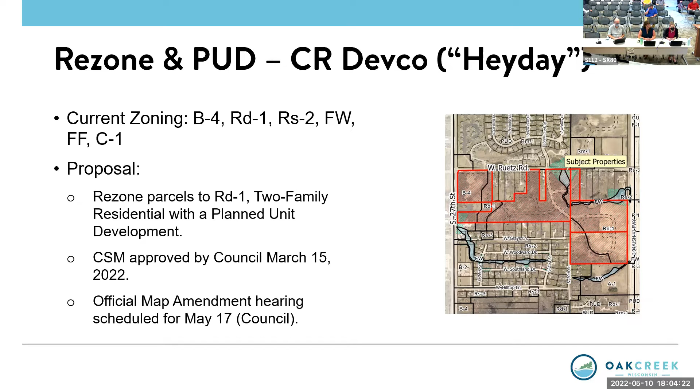RD1 to two-family residential with a planned unit development on Lot 1 of that CSM to be recorded. That CSM was approved by the council on March 15th of this year. The official map amendment reconfiguring the proposal for future street patterns throughout the properties is scheduled for a hearing before the Common Council on May 17th.

So to acquaint you with where we are talking about this evening, it is only Lot 1 as shown on the screen per that certified survey map that is affected by the rezone and PUD before you tonight.

On the screen right now is the concept development plan. This is considered the general development plan for the PUD. It does show future public streets, that connection to Puetz Road from the north, connecting down to the development on the east side of the property.

The public portion will terminate in essentially a cul-de-sac roundabout with a private development road that extends off of that cul-de-sac. 20th Street, as previously mentioned in other reviews, will have the cul-de-sac extended onto the development parcel, but it will be gated for emergency access only.

The proposal includes 134 single-family residences in a 4, 6, and 8 unit configuration in 22 ranch-style buildings. There will be one leasing and mail office at the beginning of the development on the north, accessed off of Puetz Road.

As previously mentioned, remaining lands to the west, lots 2 through 4 of that CSM to be recorded, are not part of this rezone and PUD request. There is no proposal for development of those lots at this time.

Included in the PUD are cottage home models, the design of which incorporates some craftsman style as well. They range in size from about 830 square feet to about 1,700 square feet. Materials include vinyl in various configurations, a brick base throughout the entirety of the building itself, and asphalt shingles.

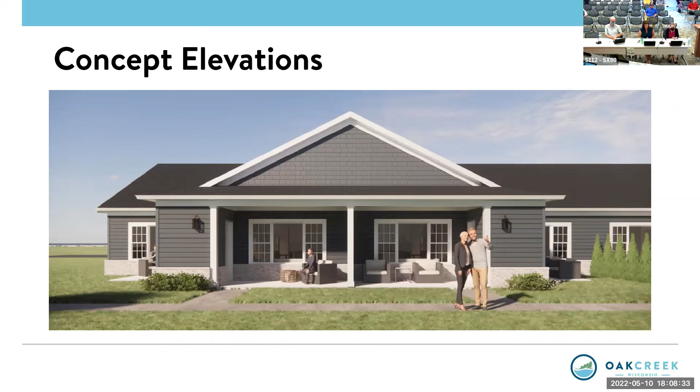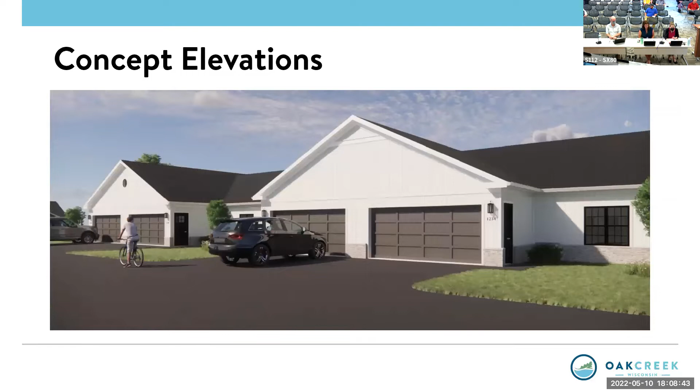On the screen right now are concept elevations showing what the configured buildings would look like. Again, these are attached units, however they are in a single-story, single-family, private walk-up entry configuration. There are various models that would look very similar but provide overall cohesiveness in the development while still allowing for some variation in color and materials.

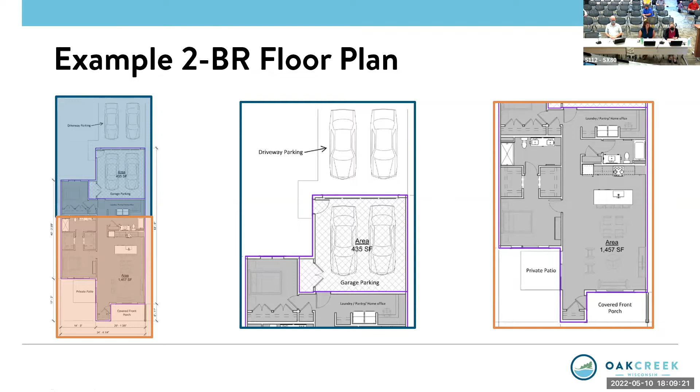On the screen right now is an example of how those two-car garages are attached in a 2-bedroom configuration. It's split up a little bit so you can get a better idea. This would be the overall configuration here on the left, the garage area, and then the parking area. So it shows that 4 parking stalls are provided for a 2-bedroom unit, and this happens to be a 1,457 square foot unit, which is an average 2-bedroom unit for the development.

There are a couple of revisions that would need to happen should this be recommended for approval. Stormwater and grading plans may need some revisions, and there is a requirement for a tree preservation, removal, and inventory plan, both pre and post development, so the applicants are aware of that requirement.

There are also currently discussions going on with SEWRPC regarding the secondary environmental corridor. There has been DNR approval of wetland fill permits. There's one small pocket of wetland that would be filled to accommodate the development road, so we are anticipating SEWRPC's determination relatively shortly. They've been out on the property in the last 2 weeks.

Just to remind the Plan Commission, the initial recommendation of approval of this PUD and rezone is not an endorsement of any site plan that has been presented before you. Any specific site, building, landscaping, or other approvals that would be required as part of the PUD conditions and restrictions would be brought back to the Plan Commission for those specific approvals.

Included in your packets were also something new as part of the code, and those are standards for review. Those are what you must base your findings upon when you make your decision for the rezone and PUD. With that in mind, there is a suggested motion for consideration on the screen.

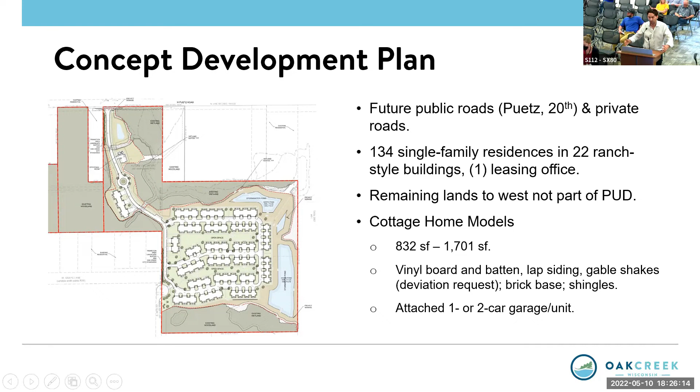Can you provide a little more information regarding, we had a couple residents with concerns, one about the grading plan and then the other with the erosion issue? Sure. I think when the appropriate time comes, when we receive the official comments from staff's review of the stormwater and all of those things, which as I understand comes at the next step, we'll make sure to have the engineering team that we're using look at that, and whatever we need to do to conform with the standards and requirements, we'll make sure that we do.

The erosion is something new to us, and if we're able to restore that, since it is in a wetland, and anytime you go into a wetland it requires DNR approval and sometimes Army Corps of Engineer approval, we'll look into what we can do to try to restore that.

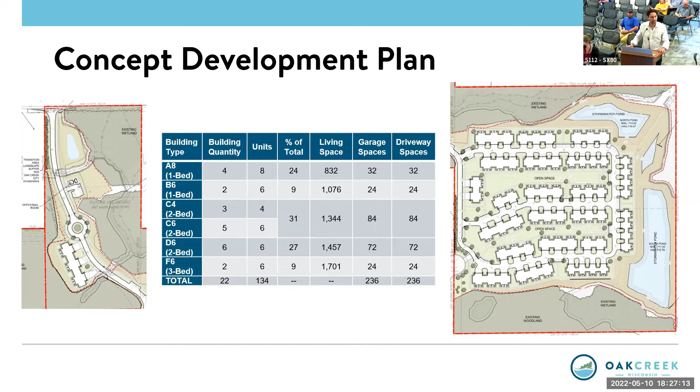Okay, and then the other resident had questions about the barrier between the current single-family houses versus the RD1 two-family residential area. Could you provide a little more information on that? Yeah, absolutely, I think Carrie did a fantastic job. We're developing lot 1 only. We have no plans right now to develop lots 2, 3, or 4. There's a lot of challenges to developing those sites, and we had originally looked at possibly developing that portion of the site. We thought there was an opportunity for everything closer to 94 to be a higher density product, like you see across from IKEA. That was our original plan when we started looking at the property, and we had to modify the plan based on all of the issues and challenges of the site, which are many, given that's the main reason why this has sat undeveloped for so long. So with the challenges in place on lots 2 and 3, we don't have any current plans to develop that portion of this property. Okay, thank you.

I just have a question for clarification, I believe it'll be for Carrie. So with the rezone, the property is already, it's not half and half, but it's already RS2 and RD1, correct? So this would rezone and make the entire piece RD1, the entire lot 1. Lot 1, you're partially correct. A majority of lot 1 is currently RD1. So if you can see my cursor, this area that is basically a rectangle, that's already RD1. What we're talking about is the access from Puetz Road and the rest of lot 1 in orange here.

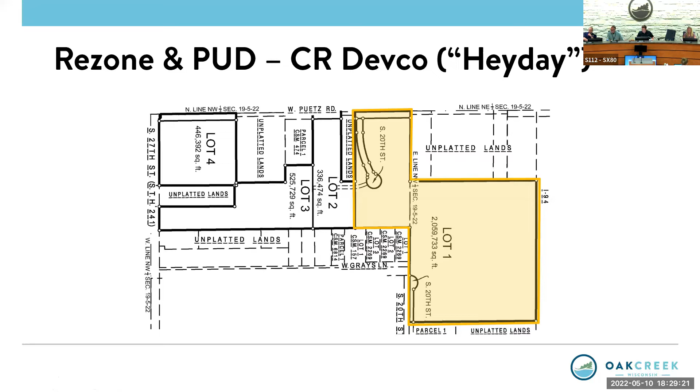Okay, thank you. So if there's no other questions from commission, I will look for a motion on item 7A.

Zakowski moves that the Plan Commission recommends to the Common Council that portions of the properties at 2231 West Puetz Road and 8843 South 13th Street and 8950 South 20th Street be rezoned to RD1 two-family residential, no change to floodway, FF flood fringe, or C1 shoreland wetland conservancy districts with the planned unit development, after a public hearing and subject to conditions and restrictions that will be prepared for the commission's review at their next meeting on May 24th.

Seifert seconds. Roll call, beginning with Commissioner Carrillo. Zinsky, aye. Loreck, aye. Zakowski, aye. O'Donnell, aye. Seifert, aye. Chandler, aye. Hannah, aye.

That brings us to item B in new business, a certified survey map. Review a certified survey map submitted by Mark Verhalen dividing the property at 500 East Oakwood Road.

Thank you, Alderman Loreck. The property at 500 East Oakwood is zoned RS3, single-family residential. This proposal is to divide the property into 3 separate lots, all of which conform to the dimensional standards and requirements for the RS3 zoning district.

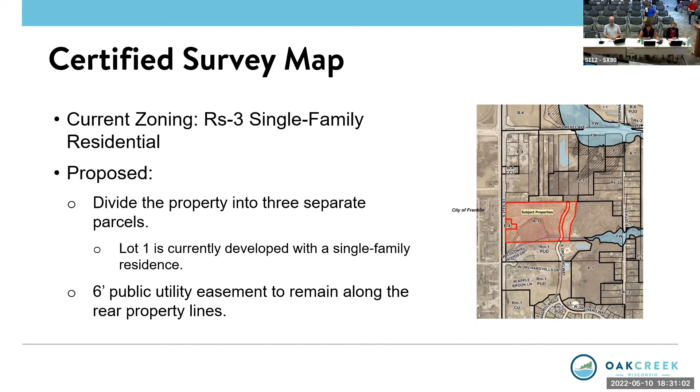Lot 1, which you can see on the left, is currently developed with a single-family residence. There's also a 6-foot wide public utility easement that will remain along the rear property line. And that's all I have. A motion has been provided for your consideration.

Thank you. Does the applicant have anything to say? Just want to wait for questions. I'll wait for questions. Okay.

So we'll go to commission, starting from my right with Commissioner Chandler. No questions, thank you. Commissioner Seifert, no questions. Commissioner Oldani, no questions. Alderman Guzekowski, no questions. Commissioner Kipchinsky, nothing from engineering. Commissioner Carrillo, nothing for me.

And Commissioner Hannah: just one question. So this is east of Howell? Correct. And this is where this golf site is? No questions. Okay, and I have no questions. So I will look for a motion on 7B.

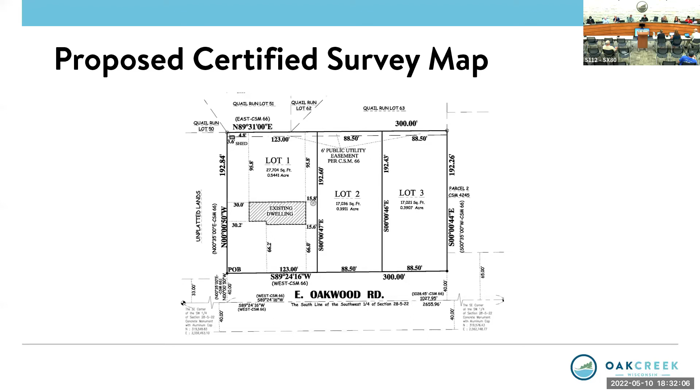Donnie moves that the Plan Commission recommends to the Common Council that the certified survey map submitted by Mark Verhalen for the property at 500 East Oakwood Road be approved with the following condition: that all technical corrections, including but not limited to spelling errors, minor coordinate geometry corrections, and corrections required for compliance with the municipal code and Wisconsin statutes, are made prior to recording.

Guzekowski will second. Roll call beginning with Commissioner Kipchinsky. Shinsky, aye. Lorik, aye. Guzikowski, aye. Oldani, aye. Seifert, aye. Chandler, aye. Hannah, aye.

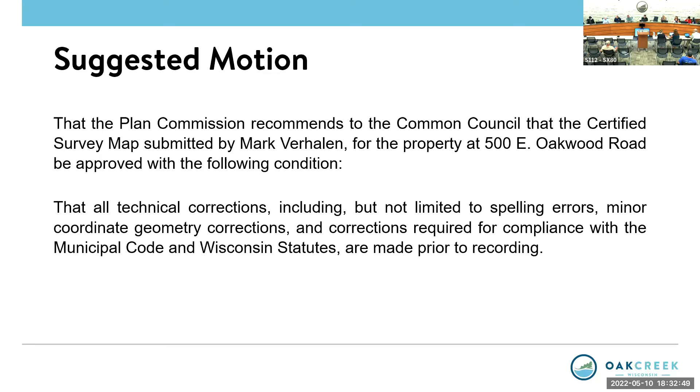Thank you. That brings us to 7C, plan review. Review site, building, landscaping, and related plans submitted by Tracey Erickson, Erickson Enterprises LLC for a car wash facility on the property at 140 West Puetz Road.

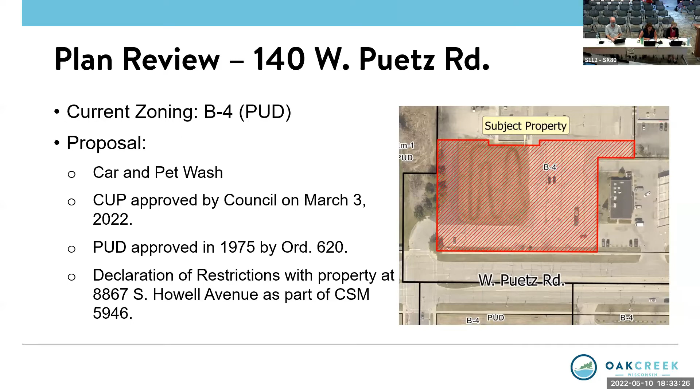Thank you, Alderman Loreck. The applicant is requesting site, building, landscaping, lighting, and related plan approval for the Peak Car Wash facility. Commission may recall approving a CUP in the last few months to operate a car wash on this property. This property is also subject to a 1975 PUD approval and a declaration of restrictions with the property at 8867 South Howell Avenue as part of CSM 5946. All these documents were included in your packet for review.

The proposed site plan on the next slide shows a 5,136 square foot automatic car wash building that includes an office on the southeast corner and a pet wash on the southwest corner. The building is oriented on the south side of the property.

There's an access point to the property from Puetz on the southwest corner of the site. There's a driveway that wraps around the south and east side of the site to access 3 drive-through lanes with payment kiosks. Parking and vacuums are in the central portion of the property, which will provide some ability to hide it with the proposed building. The lot and proposed building meet all dimensional requirements and setbacks.

The plan shows that the layout of the site will preserve cross-access over the property at 140 West Puetz for the benefit of 8581, 8645, and 8867 South Howell Avenue to the median opening on Puetz, as requested per WisDOT. The narrative provided for the CUP stated that a maximum of 8 to 10 employees will be on site for any given shift, and that operations are expected to be from 7 a.m. to 8 p.m. daily for the car wash, self-service pet wash, and vacuums.

The company anticipates between 200 to 400 customers per day at the site. Because the CUP was recommended for approval before the adoption of the new zoning code, but the conditions and restrictions reference the code as amended, staff are reviewing the plans with a hybrid approach.

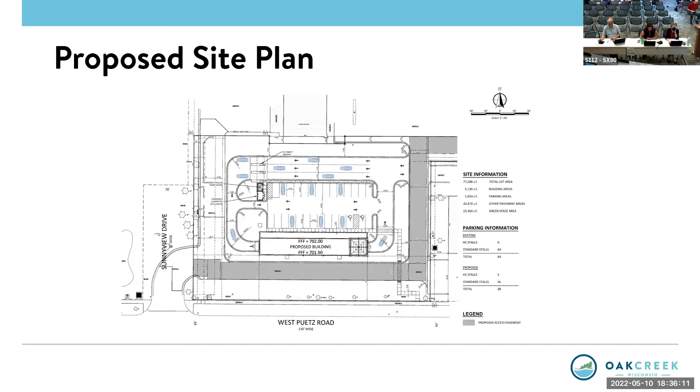There are no details for the kiosk, which will be required to be submitted with revised plans prior to the permit application submission. And Carrie, if you don't mind going to the next, thank you.

The entire building is proposed to be constructed with 4-inch brick veneer, CMU, and precast stone. Per the old code, brick must be a minimum 4 inches. The current code requires masonry in specific percentages for front, exterior side, interior side, and rear elevations. However, a minimum depth of 3 inches for masonry and stone veneer systems is acceptable.

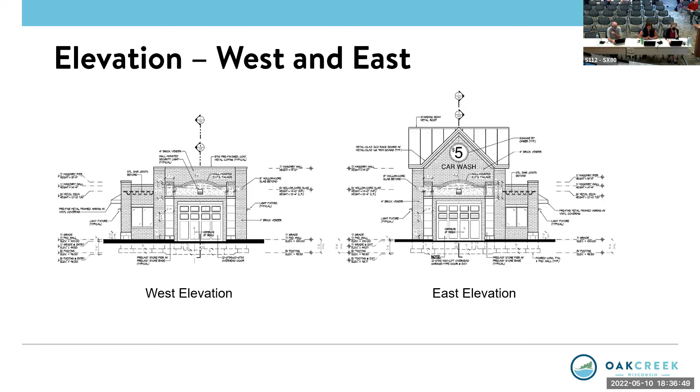EIFS as accent materials are shown at the bay entrance and exit. A standing seam metal roof is proposed for the southeast tower. Prefab metal awnings and vinyl coverings are proposed on the north elevation above the dog wash and office entryways. Staff recommends additional articulation or awnings over the windows on the south facade as they face Puetz.

No mechanical equipment outside of the vacuum pump house enclosure was identified on the plans. No details were provided for the enclosure. Staff has included the submittal of these details as a condition of approval. Likewise, all ground, building, and rooftop mechanical units, utility boxes, and transformers must be screened per code, and this requirement has also been included in the recommended conditions.

In the center of the lot, a proposed trash enclosure is located near the northeast corner of the parking lot. No details on size or construction materials were supplied in the proposal. Code requires the masonry enclosure to match the building. This requirement has been included as a condition of approval as well.

Signs are shown as placeholders and are not part of the review. Additional reviews will be required prior to permitting of the signs.

Stormwater will be addressed using an underground detention system to be placed under the parking lot. Staff recommends that the applicant continue to work closely with the engineering department for all required requirements and permits. Water and sanitary sewers must be extended to service the lot per the requirements of the Oak Creek Water and Sewer Utility. A development agreement for the public infrastructure is required prior to submission of the permit applications.

Lighting and landscaping plans have been submitted for review. However, lighting cut sheets for the fixtures and poles were not included in the plans and will be required prior to submission of the permit applications. The landscaping plan shows existing plantings along Puetz and proposed plantings to be located around the building and parking lot. Revisions are anticipated for code compliance and conformance with the CUP and will be required.

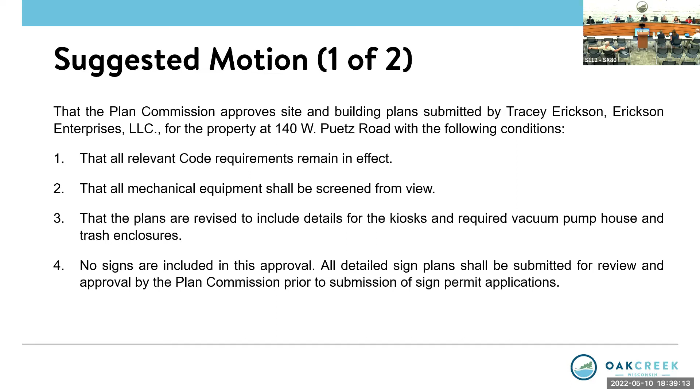So the access will be from Puetz for this facility? Correct. Is this going to impact traffic or trucking going into that facility? For the car wash, not the gas station. Would there be any truck use for the car wash? That's not anticipated. Okay, that's all I wanted to know.

Commissioner Carrillo: No, I like this design better than what we had before.

Commissioner Kupczynski: Engineering still has some concerns with the layout regarding traffic flow, and feels the entire site would work better if the access were on the west side instead of the east, basically flipping or mirroring it. This was something brought up in previous conversations as well.

Alderman Guzekowski: I have a concern about the access too, and thought flipping it might be a better idea, but I don't know the site from that perspective. Other than that, I like the building design.

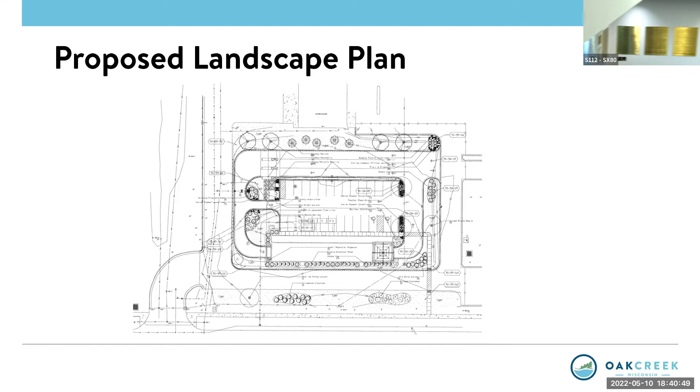Commissioner Oldani: It's better, but I'm still not crazy about the layout myself. If it's not flipped, I'm wondering why, when you come out of the car wash, instead of going left, up, and doing a U-turn, creating bottlenecking especially when busy, why not just allow the car to turn right out of the end of the car wash and exit? Unless there's a reason I'm not seeing.

It appears that would give access to the parking lot with the vacuums. You can go either way - if you want to park and vacuum, fine, but I'm guessing you'll have way more people just leaving than parking. I still anticipate bottlenecking at the main entrance on the northeast when cars start getting in line. I'd like to see an exit right out of there if it's not flipped around - at least let cars the option to exit immediately when done, out to the drive on the west, not the roadway. That's my two cents; I think you'll avoid a lot of issues if you allow that exit straight to the right.

Commissioner Siebert: I agree with Don. I'm a little concerned about the entrance and exit being in the same place - they all seem to congregate in that one northeast corner. I could see a potential problem of people turning in there, taking a sharp turn, and catching the person coming out. So I'm not totally satisfied with that entrance and exit arrangement.

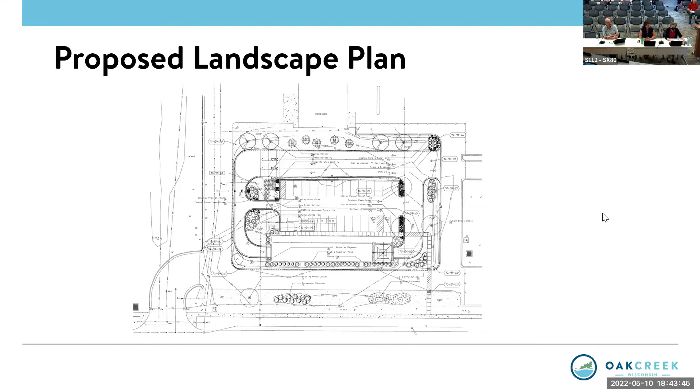Alderman Loreck: If I may - in the staff report, it was mentioned that the south elevation, facing Puetz Road, required changes to more closely resemble the north elevation, facing the parking lot. If you could bring up those elevations, Carrie, so we can see where we're coming from. I want to make sure the commission discusses whether the architect should incorporate the same design elements - the columns, the brickwork - into the south elevation, since that's what will be seen by the majority of people.

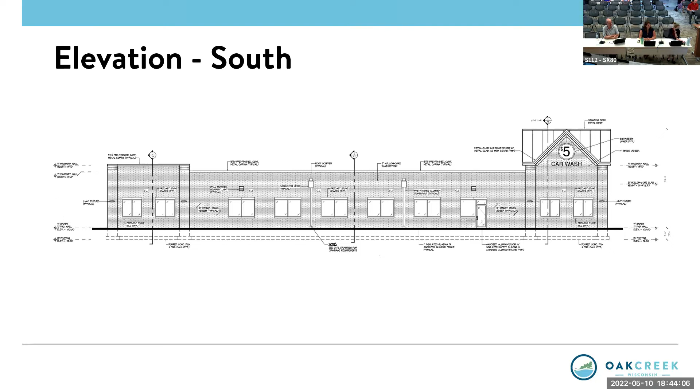You can see a very significant difference between the two elevations. I like the north elevation, don't like the south elevation. I agree - the south elevation is the one most visible to traffic coming down Puetz. I'll let the other commissioners speak for themselves, but I'd agree the design elements should be required on both sides. Is there a reason why they're not identical?

Maybe we should hold on this item because we need a lot of questions asked. We make a motion to hold this item. Yes, I agree. Okay, hold on, before we hold it.

If it's voted no as read, they can still resubmit and make changes, correct?

I think it would be appropriate to provide the applicant with an opportunity to respond to the Plan Commission's concerns before you make a decision, given the fact that they are not here to hear what the concerns are tonight. We do always mention that we require somebody to be here to represent, just for this very reason, in case there are questions or concerns by the Plan Commission that they can answer. So I do think that giving them an opportunity to respond is appropriate.

Okay, not to be a smart, but they have that opportunity right now. All right, we're giving them an opportunity here and now.

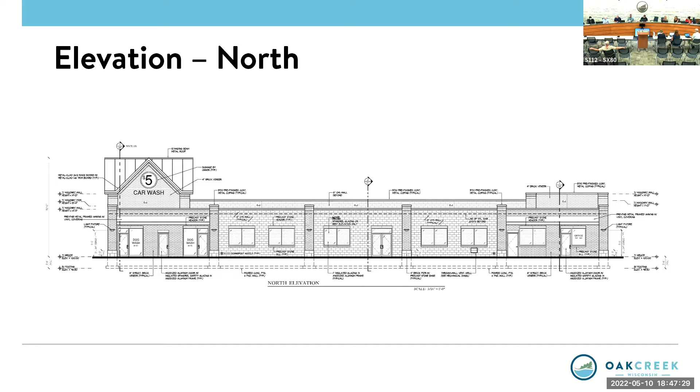Somebody want to make the motion? Guzikowski makes the motion to hold item 7C until a future meeting. Just hold it, just held. Seifert seconds. Roll call beginning with me: Loreck, aye. Guzikowski, aye. Oldani, aye. Seifert, aye. Chandler, aye. And I.

Okay, thank you. And if the applicant is listening online somewhere, please work with staff to move forward on that one.

That brings us to 7D, plan review: review site, building, landscaping, and related plans submitted by Greg Policek, Summit Credit Union, for a financial institution with drive-through facilities on the property at 7853 South Highgate Avenue. Carrie? Thank you, Mr. Chairman.

This is part of the Highgate Planned Unit Development. This may be familiar to some of you, as it was reviewed previously in 2019. However, due to various circumstances, including COVID, the building permit did not go forward, and the approvals lapsed. Also, between when the original site plans were reviewed and now, financial institutions as part of the Highgate development, and indeed as part of the new zoning code, no longer require conditional use permits. So they can proceed with site and building plan review without needing to go forward with a conditional use permit.

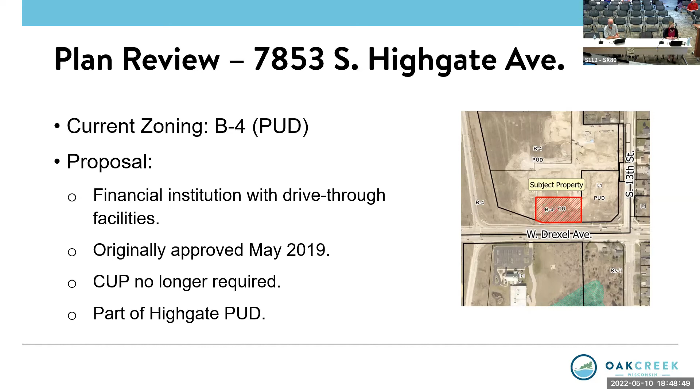Again, this is a financial institution, it does have drive-through facilities, and again, it is part of the Highgate development. So there are a couple of considerations with regard to especially landscaping that we will get into. At your stations, there should be revised plans, hot off the presses, just got them this afternoon. These incorporate some of the staff comments included in the staff report. There are also amended conditions that will be on the screen for consideration. So let's just go through these.

The proposal is for a roughly 3,700 gross square foot credit union building shown in the center of the property. Setbacks appear to be met, and there is access to this property via the interior PUD roads only, no access from Drexel, no access from 13th Street. That's actually shown on the screen right now. The 3 drive-through lanes are on the northwest portion of the property, 2 for a teller window and 1 for an ATM.

In the current code, we're giving this kind of a hybrid approach because they did receive approval back in 2019 under the old code, and they have updated some of these things to comply with revised code requirements, as well as the landscape review for the master landscape plan for the Highgate development.

The current code has a requirement for drive-through facilities to have an emergency exit lane, or bypass lane. What we are considering is the ATM lane, which will not always be utilized and will not have stacking traffic to the extent that the teller windows and lanes will, and it's a little bit wider than the other two. We are considering that to be in fulfillment of the bypass lane requirement, especially considering that was not included in the code back in 2019.

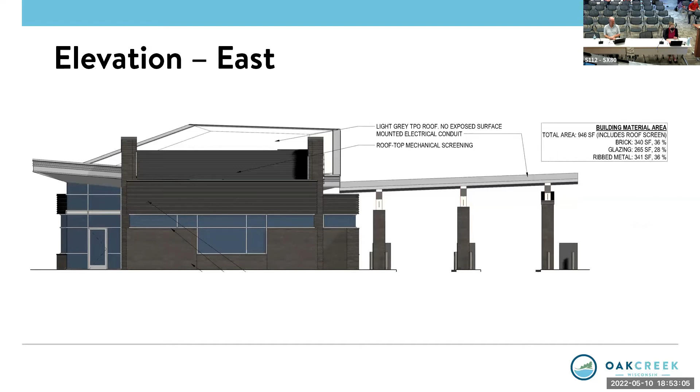This is what would be seen from the east, so as you're going westbound on Drexel Avenue, and you can see the drive-through canopy there, and the west. So this is what would be facing roughly the Texas Roadhouse.

A couple more details for you. The fabric sunshades that you can kind of see in this image, these triangular shades, those are considered architectural elements, and there won't be any words or phrases or anything. There are 2 options that are at Summit's discretion. They can either have smiling people, as in this depiction, or they can have abstract geometric shapes.

For that comparison, if anybody is familiar with the Summit Credit Union location in Franklin by the Pick and Save, I think it's Wyndham Village or something akin to that is the development name, those are the geometric shades that they have at that location.

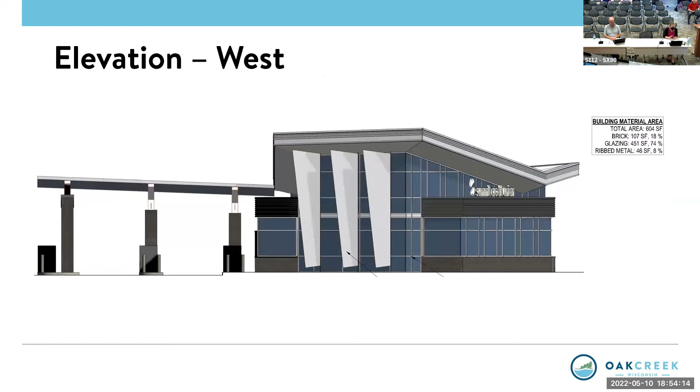The signs shown on the building itself on these elevations are placeholders at this time. Although we did receive more details for the signs after the Plan Commission reports were sent out, we couldn't incorporate that review into this one for this evening. We do believe there may be a requirement for a sign appeal at some point. We just need a little bit more time to figure out exactly what that requirement is.

We also did receive trash enclosure details. I do not have a graphic depiction on the screen, but those have been incorporated. The one comment that staff has on that is with regard to the gate.

They are showing a wood gate, and because we still have a concern regarding the use of flammable materials, even if they're treated, we have that concern for potential fire. We've been recommending everybody incorporate non-flammable materials for gates and dumpster enclosures - either composite, which one could argue is flammable or non-flammable, or a metal gate. We're recommending that out of an abundance of caution, just one errant cigarette or someone not paying attention using something they shouldn't. We've seen an example of an enclosure that has gone up in flames, so we want to avoid that as much as possible.

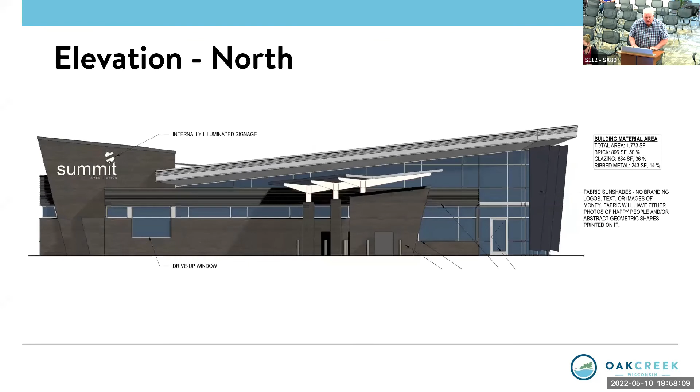I'll turn over to the commission on my right, starting with Commissioner Chandler. I do have a question for the applicant. With the majority of the changes, a lot of my questions were answered. I just have one additional question - in regards to the pedestrian walking area, it looks like you've added some items here. Can you share the details specific to pedestrian safety?

There was a walkway installed to the west of this property, and we were tying into that walkway. I'll ask our architect, Austin, to address specifically, because I think he may have a response regarding the material that he used.

Good evening, I'm Austin Conrad, 5420 Preston Place, McFarland, Wisconsin. So in regard to the walkways, are you asking about the material change specifically? It looks like the pedestrian crossings have been changed, modified since our last review. I'm not entirely certain - I'm blanking on which change we made.

Can you go through the details on the areas pedestrians should use for safety purposes? We have a connector out to the street so pedestrians and/or bicycle access can be more safely brought into the site. Our bicycle parking is right after you cross that exit lane for the drive-through, so that's very accessible and doesn't need to cross much traffic, just to keep people safe. We also have another high visibility connector that connects the two sections of the parking - again, we really want to make sure people are safe when they approach us.

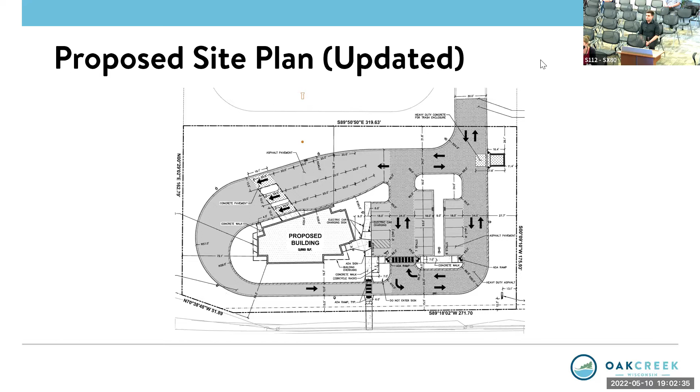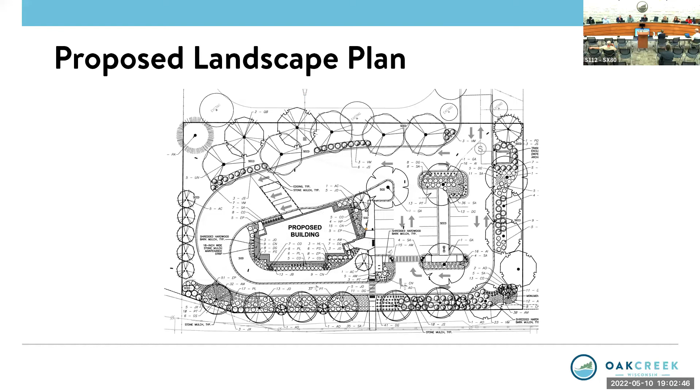Okay, the only thing I'll add, it didn't sound like there was any concern over the ribbed metal, which is what's required at the 3/4 majority. I think it looks good, I have no concern over that.

And then as far as the banners, was that brought up because they're asking the commission's opinion on that? We want to make sure it's clear we are not considering these to be signs, we're considering them to be architectural elements. Okay.

And I have no other concerns or questions, so we'll look for a motion on item 7D.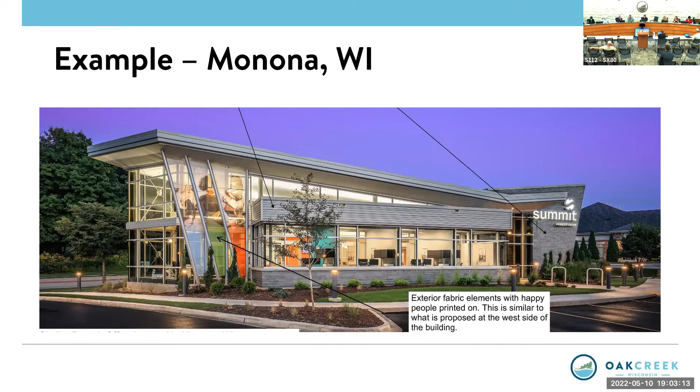Holdani moves that the Plan Commission approve site and building plans submitted by Greg Policek, Summit Credit Union, for the property at 7853 South Highgate Avenue with the following conditions: 1, that all relevant code requirements and conditions of the planned unit development remain in effect; 2, that the plans are revised to include dimensions for the drive-through lanes.

Mr. Holdani? Yes. Please read off the screen because those conditions have changed. Okay, how far back do I gotta go? Condition number 2 should state that the landscape plans are revised. Okay, number 2, that the landscape plans are revised to meet all requirements of the landscape plan and design guidelines for the Highgate PUD prior to submission of permit applications.

3, that the mechanical equipment, transformers, and utility boxes, ground, building, and rooftop shall be screened per code. 4, that detailed plans for signage are reviewed and approved by the Plan Commission prior to submission of sign permit applications. 5, that the plans for the trash enclosure gates are revised to incorporate non-flammable material.

6, that all pole-mounted light sources are shielded and directed downward, that the color temperature of the fixtures is limited to a maximum of 3,500 kelvins, and that light sources are shielded on the side of the fixture adjacent to Drexel Avenue. 7, that all detailed final plans are submitted in digital format to the Department of Community Development prior to submission of permit applications.

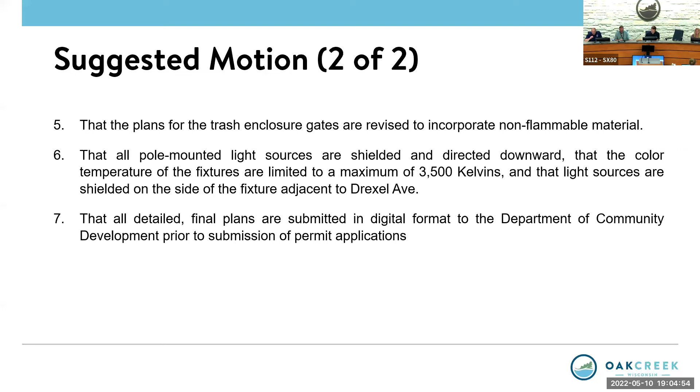Seifert seconds. Roll call beginning with Alderman Guzekowski. Guzekowski, aye. Holdani, aye. Seifert, aye. Chandler, aye. Anna, aye. Carrillo, aye. Kupczynski, aye. Lorick, aye.

Okay, item 7E was requested held by the applicant. So that brings us to item 7F, which is plan review: review site, building, and related plans submitted by Gary Aheron, LabCorp, for parking lot modifications, outdoor utilities, and trash enclosures, and a covered ramp and stair on the west side of Building B on the property at 140 East Rawson Avenue.

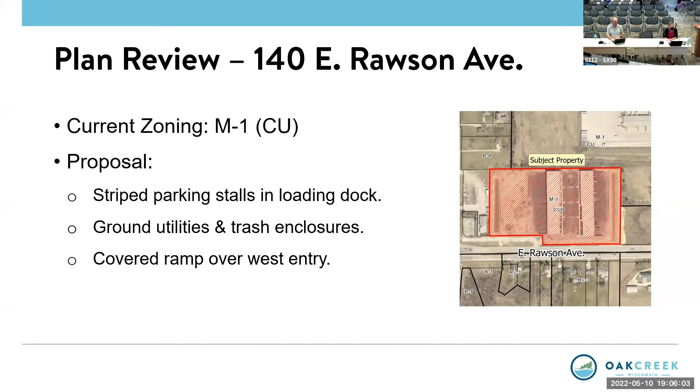Carrie? Thank you, Mr. Chairman. This is the multi-tenant industrial development on Rawson Avenue that the Plan Commission is fairly familiar with at this point. The proposal is, as read by the chairman, striped parking stalls in the loading dock on the west, ground utilities and trash enclosures, as well as a covered ramp over the west entry. This is for the LabCorp tenant space in the northern approximately 25,000 square feet of Building B. That's the location highlighted in yellow on your screen, which includes the building and the parking area or loading dock area we are going to be discussing.

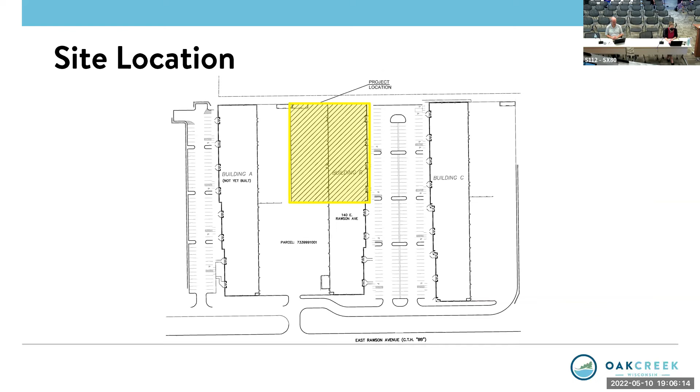In the next two screens, I'm going to be showing the same site plan, just in a different configuration. This shows Building B, the loading area, the proposal, and the parking between buildings B and C. That's on the top part of the screen here.

It's a little bit difficult to read because of the gray background, but the white area is incorporating the approximate area of the building that will be occupied by the LabCorp tenant.

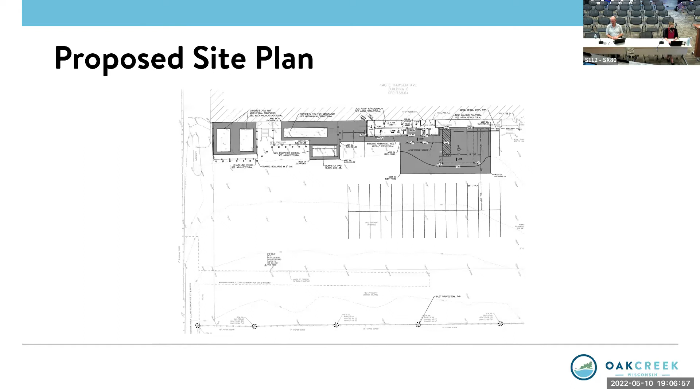On the screen right now is a clearer picture of what they're proposing. They would like to include striped stalls in the loading dock area, an enclosure for some ground-mounted mechanical units, and a trash enclosure specific to the LabCorp tenant space.

You can kind of see the location of the proposal to remove a couple of stairs and incorporate a ramp and modified stair covered by a proposed steel canopy. The other portion incorporates removal of existing loading docks to accommodate these changes. This is the enlarged portion of that change.

The chain link fence has been updated, and around the mechanical units it's proposed to be a 6-foot tall wood fence. Around the trash enclosure, I believe they're proposing CMU.

The parking stalls in a block here are just part of the overall 34 they are hoping to stripe. You can see about 4 parking stalls adjacent to where that new entry will be, and a couple other parking stalls here. They are proposing to retain at least one of the existing loading dock overhead doors.

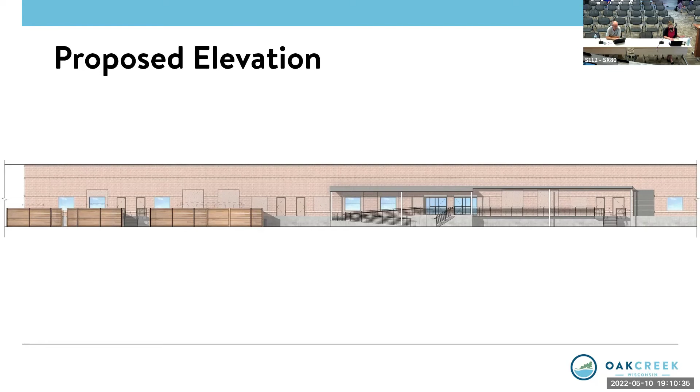Just a reminder with regard to the parking: back when the development was originally reviewed, the landowner and applicant had provided information that over 270 parking stalls were going to be provided to be shared amongst the 3 multi-tenant buildings, and that was going to be adequate based on similar developments. They constructed or striped for about 280 parking stalls, or at least that was what was said at the time.

And 95 were designated to serve buildings B and C. Or 95 was to serve building B, and then some of the 95 parking stalls between B and C were also supposed to be utilized.

What we have seen through every iteration of a conditional use permit amendment is that we have tenants in both buildings B and C continuing to use this shared parking arrangement. While we've said parking is the responsibility of the management company or landlord to ensure all their tenants have adequate parking, clearly at this time it's not enough for one of their tenants, which is why the proposal to incorporate these striped stalls in the loading dock area is before the Plan Commission.

What staff's concern is, if we allow for particularly the group of about 28 parking stalls to be striped in this loading dock area, it impinges upon the ability of the future building A loading dock area potentially.

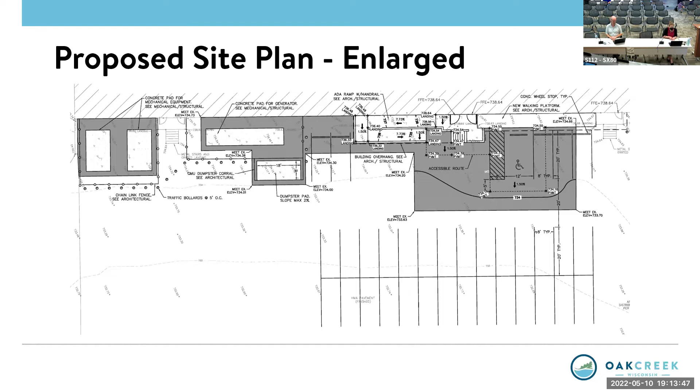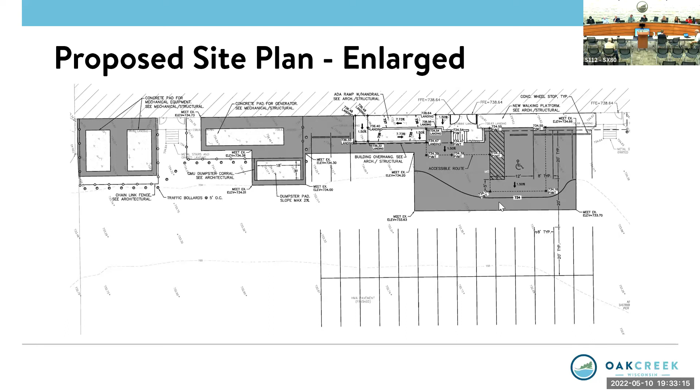Seifert moves that the Plan Commission approves the site, building, and related plans submitted by Gary Aherron, Labcorp for the property at 140 East Rawson Avenue with the following conditions: one, that all relevant code requirements remain in effect; two, that the plans are revised to meet all code requirements for trash receptacles; three, that all revised plans are submitted in digital format for review and approval by the Department of Community Development prior to the submission of permit applications.

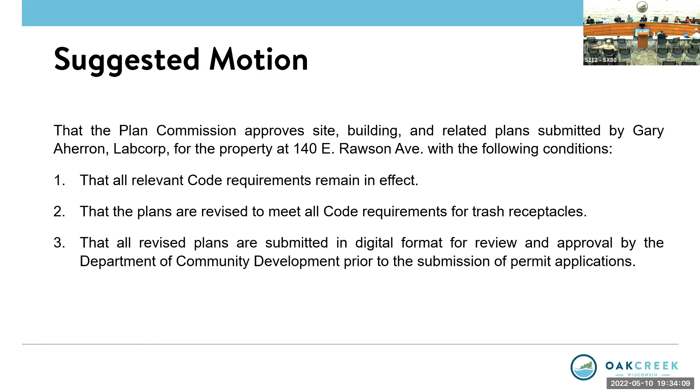Okay, that brings us to our last item, 7G. This is a planned unit development amendment. Review a request submitted by Erica Nicole Harris, Wispark LLC, for an amendment to the existing Oakview Business Park planned unit development affecting the property at 200 West Oakview Parkway.

Carrie? Thank you, Mr. Chairman. This is part of Oakview Business Park, and while part of the request is to amend the general development plan that affects the entire park, it's really very specific to 200 West Oakview Parkway. So we are going to be focusing on this particular parcel. There are some amendments that have been requested that affect open space landscaping, the landscape area for this parcel, and parking lot screening.

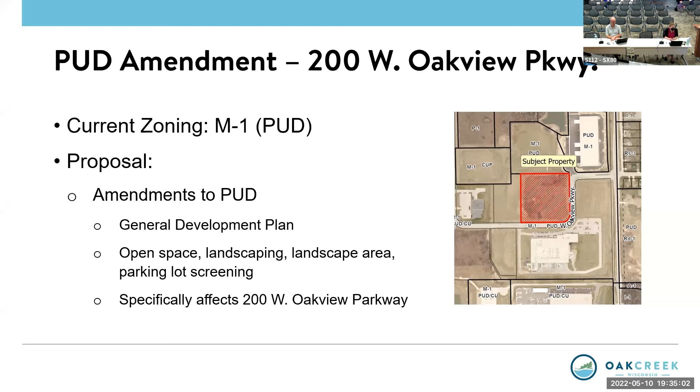Specifically in the current PUD, this is the general development plan as it pertains to the parcel in question. Now, in this graphic, it shows the parcel as 2 distinct parcels, and you can see that there are woodland areas identified by the lighter gray, and wetland areas identified by the darker gray. The GDP, or General Development Plan, was approved in 2014 as part of the original and as part of the revised PUD under which we are currently reviewing items in Oakview Business Park. The woodland area encompasses approximately 6 acres of the overall site of approximately 8 to 9.

At the last CSM that was recorded, which was CSM 9131 in your packets, that was following the last PUD revision, and that incorporated 8.2 acres as the overall site. That includes the woodland and the wetland and the potentially development area.

Wetlands were shown on the CSM. However, the woodland area was not. So this is what was recorded, showing a larger site instead of two smaller parcels.

We've recently been in discussions with Wispark, who's the landowner, and a potential user of the property, a developer. And the question arose as to what extent the proposal would be subject to the old code versus the new code.

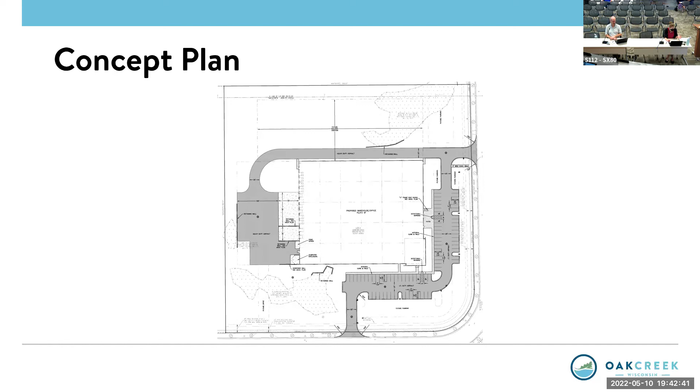So with that in mind, this is a very long two-part motion, but I'd like to turn it over to Director Seymour for any additional comments.

Yeah, thank you, Carrie. This really comes down to the overall vision for the park, and as the applicant will probably further clarify for you, when the park was developed, the regulatory framework and permitting of this parcel, in particular the wetlands, didn't really sync up with the original permitting, and there were other wetlands on the property, but they just weren't addressed at the same time. That's why they were shown in this parcel that was aside from the buildable area.

They will tell you that it was always the intent to develop that parcel, and we're not going to dispute that, but the fact that it was shown in one way in the general development plan kind of created a little bit of an issue. So this would clear up the intent, that with any permitting required through the DNR or what have you, this lot would be available for development in accordance with the standards for the rest of the lots in the development.

That's really our goal as well, to provide a consistent framework to be applied across all the lots in the development. We don't want, there's probably one or two lots available in the business park, and we don't want to create a situation where additional standards are being imposed on one lot in the park that may not be imposed on the others.

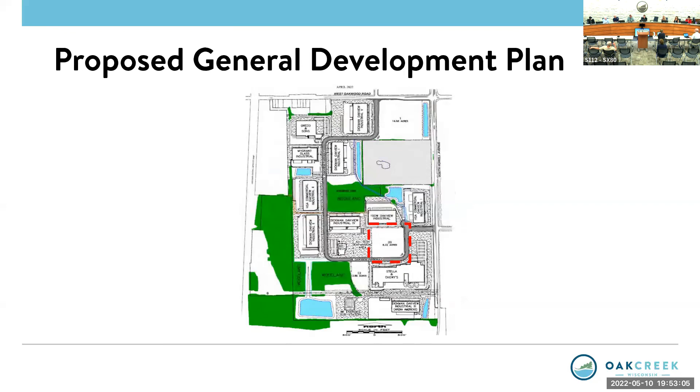I do think from Wispark's perspective, they always intended to develop that lot.

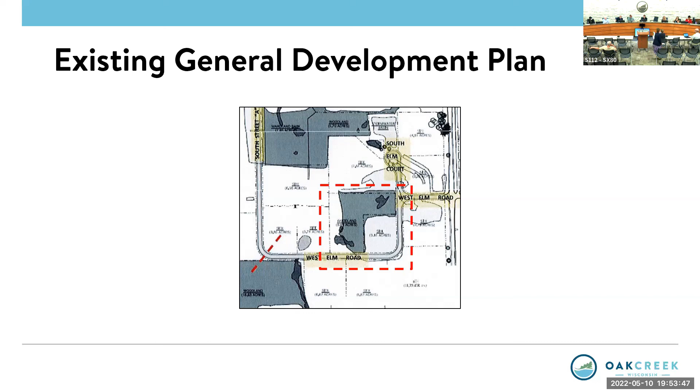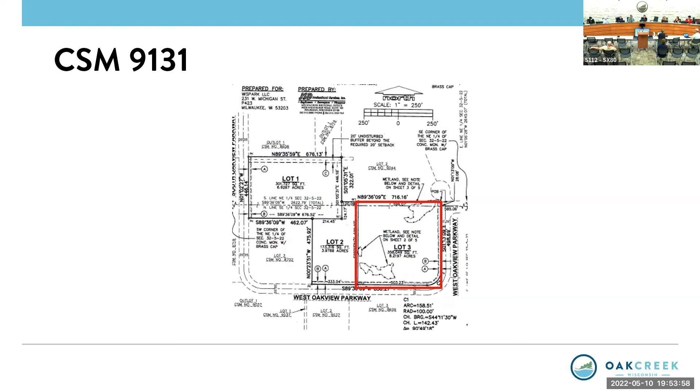As far as your discussions in the future with the tree, nobody in the city is going to say we have too many trees. So definitely have discussions to replant trees elsewhere. Looking at the concept plan, I don't know that you can require it, but if there's a way to keep some of the trees not impacted by cement and building, that'd be great too. Relocating, as you already stated, somewhere else in the business park, even if Wispark is willing to do it in a neighborhood or city park, just to get more trees, is definitely a good thing.

As far as the agenda item, I have no issues after the discussion. So we will look for a motion if there's no other questions.

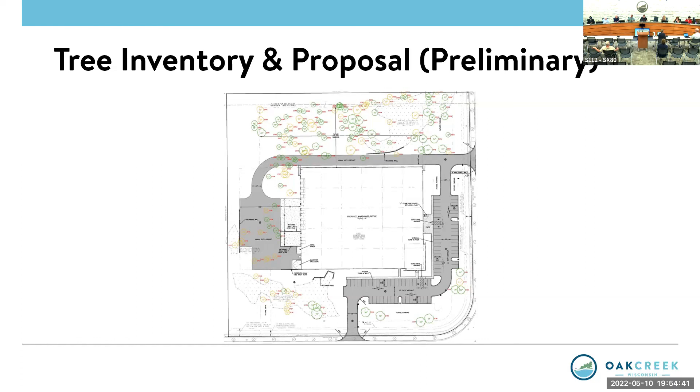Ladani moves that the Plan Commission recommends that the Common Council approve an amendment to the General Development Plan governing the M1 PUD for the Oakview Business Park. Tax keys as listed, that would A, remove the woodland designation from the property at 200 West Oakview Parkway as depicted on the amended general development plan, and B, amend the conditions and restrictions relating to open space, landscaping, landscape area, and parking lot screening, such that municipal code section 17.0505 shall not apply and that the landscaping standards in effect prior to March 15, 2022 shall apply to all parcels within the planned unit development after a public hearing subject to the following conditions.

One, it is the responsibility of the property owner to secure any permits or approvals for impacts to on-site wetlands or isolated natural resource areas prior to the commencement of any site disturbing activities in those areas. Two, that any changes to approved grading, drainage, utility, or stormwater management plans be approved by the city engineer prior to the issuance of any building permits or site disturbance.